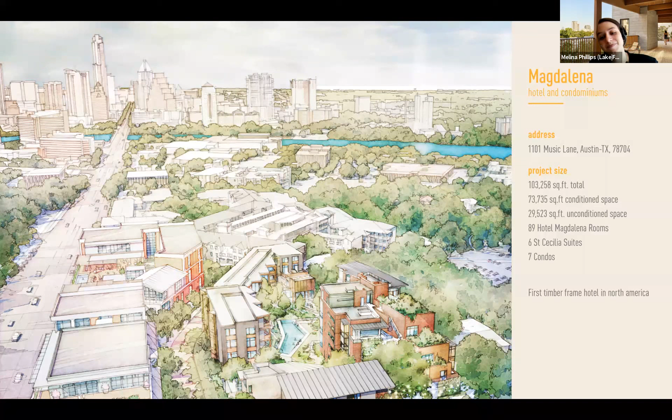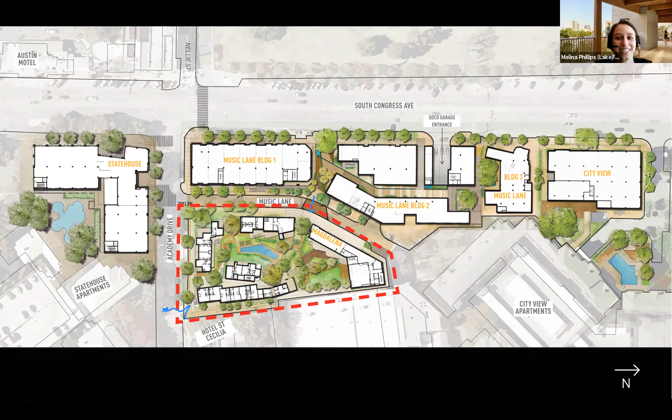So I'll give you a brief history of the site where the Hotel Magdalena now sits. In the 1930s, all the way up until the 1970s, South Congress was the highway that connected San Antonio to Austin. As you drove into the city, there were many ultra-modern motor courts that were dappled along the street, leading up to the state capitol, which is larger than the nation's capital, and it was this big, beautiful moment.

In the 1950s, Terrace Motor Hotel opened its doors with 366 rooms, 2 restaurants, the Char Grill Chop House and Summer House, which is actually the name of our restaurant currently, Summer House on Music Lane. It was the first convention hotel in Austin, and people came from all over the state to bring their families there to vacation, maybe to meet the singing barber that was greeting them down in the basement.

In the 1970s, when I-35 came to be, a lot of the traffic in the area got rerouted. This led to the disrepair and sort of seediness that became South Congress. 1974-ish, Willie Nelson came in and bought up 14 acres east of Congress, including the Terrace Motor Hotel. At the time, it was apartments. He had his friends and roadies and bands come and stay and hang out there.

He actually had a falling out with a guy who owned one of the music venues downtown Austin. And he thought, you know what? I have this convention center. Why don't I turn it into a music venue? And so he did just that. It became the Austin Opry House. It was legendary for 30 plus years. And the likes of Ike and Tina Turner and Dolly Parton came and played there.

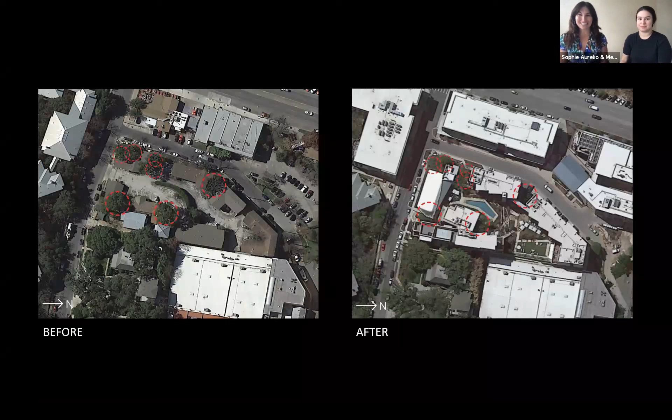On to Christine. So I'm going to talk a little bit about the site now. These before and after photos show the similarity of building massings between the terrace apartments on the left side and the new hotel development on the right. Much of that decision on the design team was in order to protect the 7 heritage oaks shown in the red dashed circles. The existing conditions were very constrained, with small planting areas retained by walls and surrounded by tons of asphalt. We significantly improved the rooting conditions of those trees.

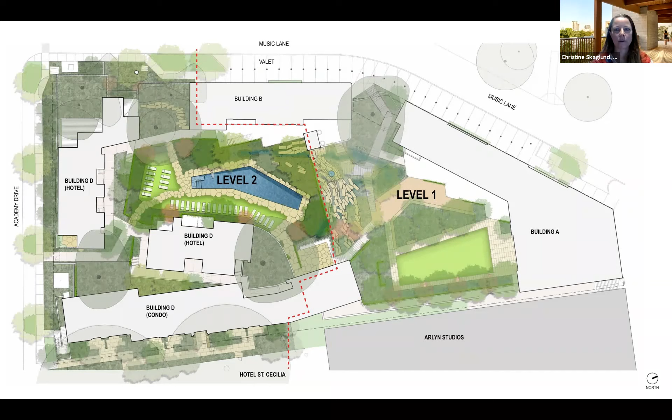This plan shows the new design with the buildings oriented around the perimeter and courtyard green spaces central to the project. The exterior streetscape is highly urbanized, 1 block off South Congress, while the interior is a secret and peaceful oasis that is not revealed until entering the project. The overarching design inspiration was that of a 70s lake house within the context of dramatic hill country geography. Local materials were utilized and a thread of water conveys across the site.

And this diagram better depicts the elevation changes across the site, which measures about 1 acre with 29 feet of grade change left to right.

Sorry about the trash pickup outside.

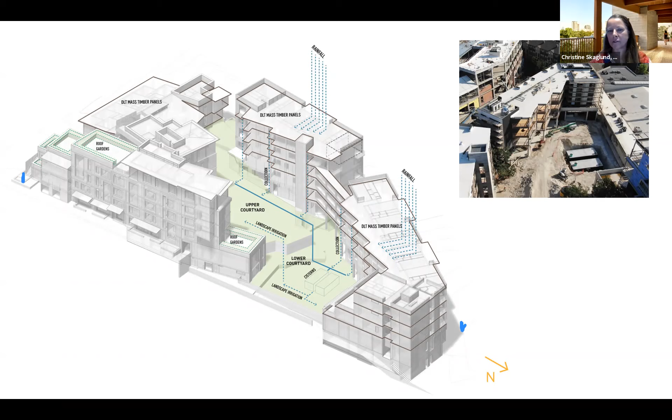The 4 buildings have multiple finished floor elevations, making ADA access challenging. Also, all stormwater is held on site, making drainage especially challenging. Surface flowing rainwater across the steep quarry block wall then conveys under pedestrian bridges to designed rain gardens at the lower level. Building downspouts hard pipe to underground cisterns under the event lawn. The inset photo shows the cisterns being installed in solid limestone. The water in the cisterns is reused for landscape irrigation.

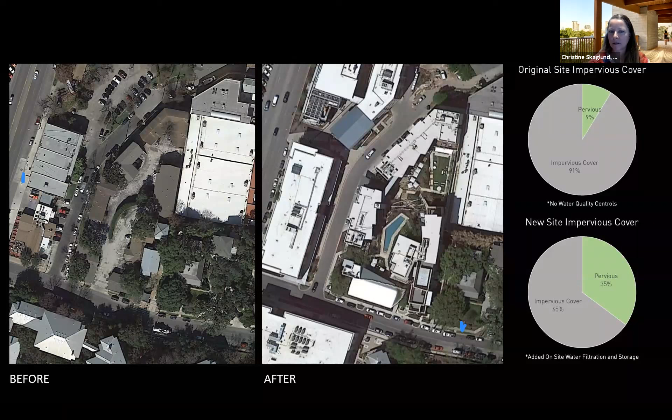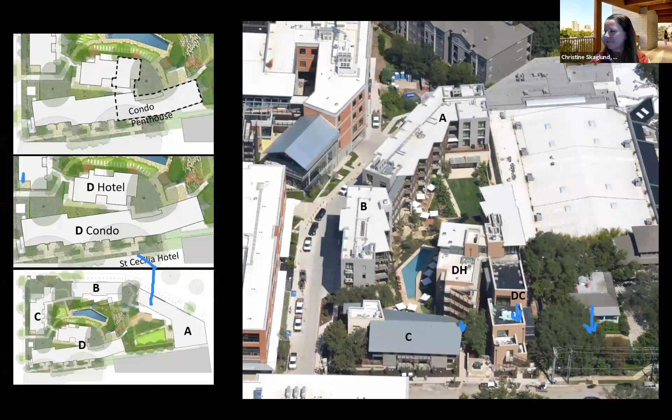Yes, I'll just give a brief overview of the architecture. So here's an overview of the different buildings on the site to help orient you. Buildings A, B, and C are mass timber type 5A construction over 1A podium for buildings A and B, as C is slab on grade. Building D is type 2A, mostly concrete structure with steel for the framing of the penthouse only. Building D is split between hotel and condo residences with the penthouse spanning both wings at the top.

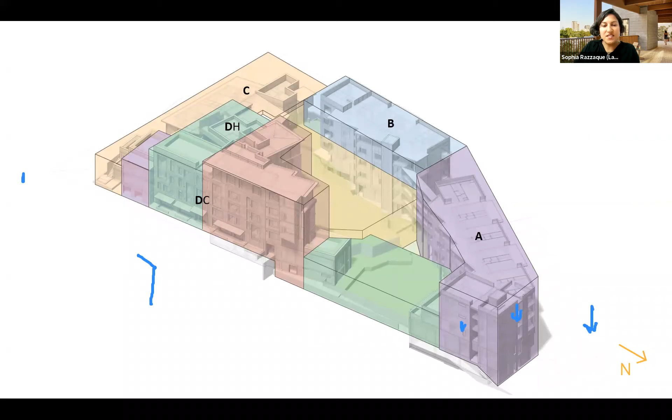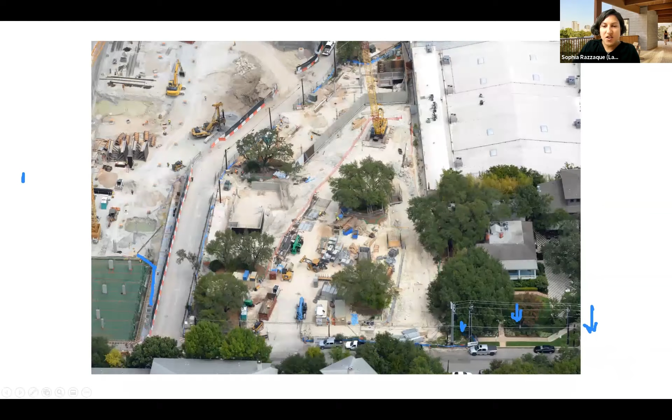And here is a time lapse we put together from the aerial photos that the contractor sent us over the course of the project to kind of help show the sequencing of the project. The concrete started first, then the mass timber, with buildings A, B, and D happening first, and then C came in last, basically once the landscape was complete.

And now I'll hand it to Melina. All right. I don't know if we can clear the annotations there, but yes.

Yeah, so our finish palette had a variety of materials. The hotel portion of the project mostly consisted of stucco volumes over stone, with sunken groove wood siding in the recessed porches and some other areas like at the restaurant down below. The exterior wood structure, both framing and the decking, were all Doug fir as well, but they were finished in a weathered gray stain that we coordinated with StructureCraft on.

And then the residential portion of the project, which is on the right, was wrapped all in two Norman 5 brick blends. And after mock-ups and dry stacks and all that, we also had to work with Acme on rerunning a couple of the color blends. Well, one of the colors actually had to be run twice, but we were able to figure it out despite the really busy manufacturing queue that they had at the time.

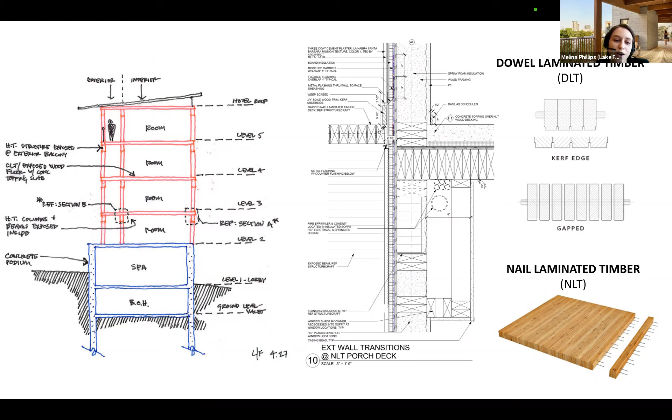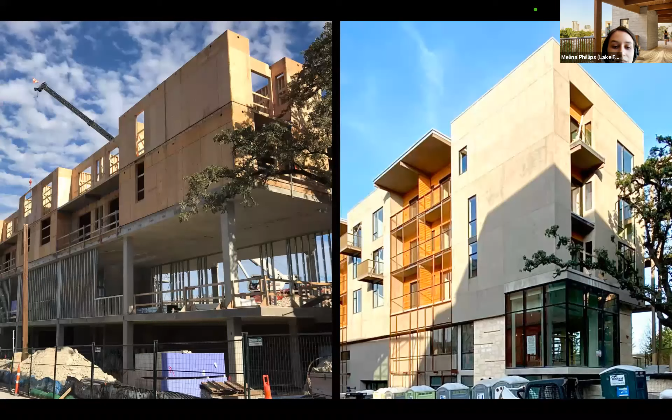Our office also did an LCA analysis after the project, and we found out that by using mass timber for the 3 hotel buildings instead of concrete and steel, we were able to reduce the global warming potential by 10 to 38%, depending on if biogenic carbon is included in a calculation or not.

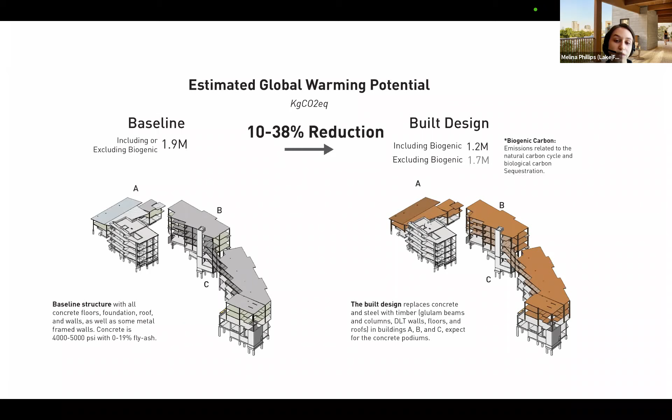And the use of mass timber also helped us further reduce the carbon footprint. One, because the single loaded corridors that are typically enclosed and conditioned were pushed to the exterior and being completely outdoors. And then 2, by exposing the mass timber on the interior, there were a lot of finished materials that were also not necessary. And I'll hand off to Ruthie.

Thanks, Melina. So as the structural engineer, our work usually gets covered up. So it's very fun to be on a project like this where we can showcase the structure. There were actually 2 structural engineers on this project, like people have been mentioning. My firm, AEC, did the base building up to the PT podium slab for the hotel buildings A and B, as well as all of the structure for the DC and DH buildings. And then StructureCraft did the mass timber levels that sit on top of our podium at the hotel buildings.

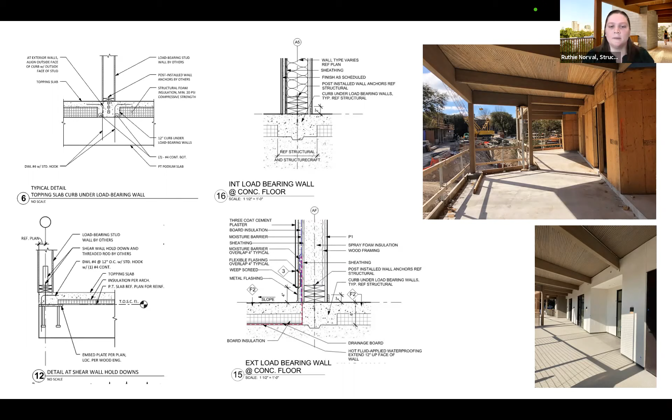This required that we use a different aggregate. A small diameter washed river rock was used for the topping slabs to give them the desired finish, rather than a typical larger sized limestone aggregate that we use in the structural slabs. Finally, separating the topping slab from the structural slab below allowed us to add an insulation layer. This rigid insulation allowed for the built-in slope at the balconies, separation between unconditioned space above and conditioned space below, and protection of the waterproofing layer.

So I mentioned that the topping slabs were ground down to expose the aggregate. While we ended up with a gorgeous final product, there were a few bumps along the way. These 3-inch topping slabs were poured during the summer, which meant that the slab was already very prone to shrinkage cracks, of which we had a lot. The control joints weren't installed in the right time frame, and so the cracking of the slab had already begun when it was realized that they hadn't been placed.

One final interesting structural coordination item was the column bases. Originally, the columns would have sat on top of the topping slab and insulation floor sandwich. However, because of StructureCraft's very tight installation timeline and lack of availability of higher compressive strength insulation, the concrete column base plinths had to be poured first. This allowed for the topping slab and the breezeway to be poured later while mass timber installation continued.

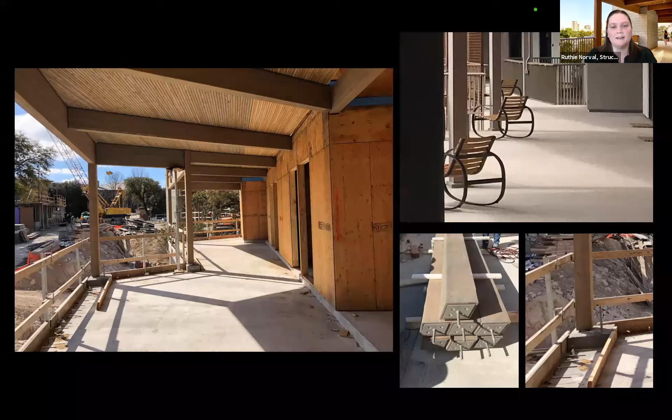So now I'm going to pass back to Sophia, who will talk about the public spaces in the hotel. Thanks, Ruthie.

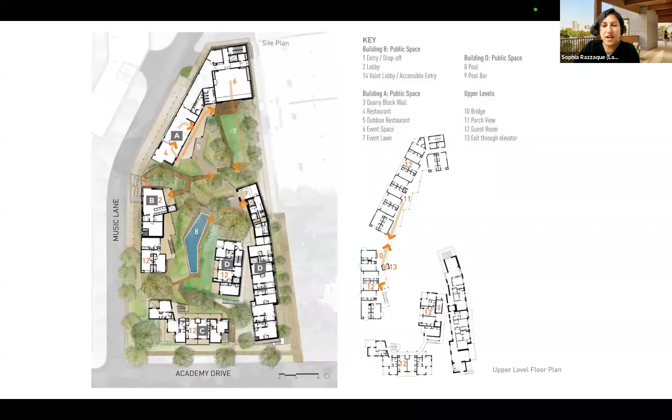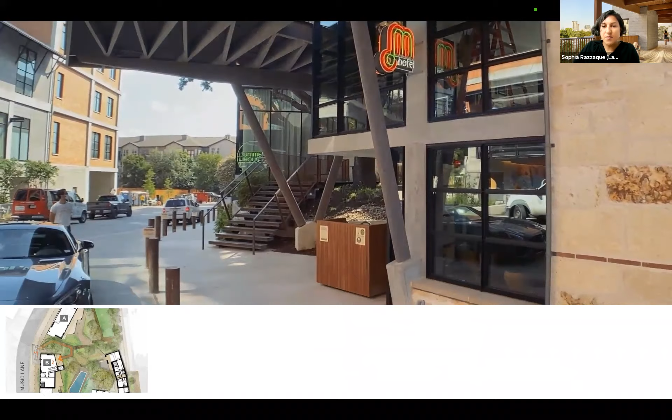Here's an overview of the entire tour route, starting at the entry, moving through the public spaces, then visiting the upper level walkways and a typical room, and finally ending via the main elevator back down to the valet lobby. Guests arrive at the street under the custom designed heavy timber framed porte-cochere. It has those V column references Melina talked about. And you're invited to take the stairs up and around the heritage live oak tree that Christine mentioned earlier, leading to the lobby above.

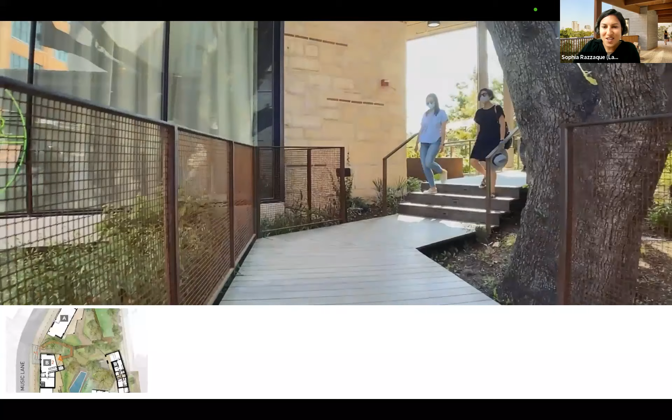Along the way, you get that sense of compression under the bridge and then release out into the oasis that is the courtyard. You hang a right and see the lobby with its large pocketing door open, pulling you into the space where you're greeted by one of the many super friendly hotel staff to welcome you in.

Lake Flato worked collaboratively with Bunkhouse on the design of the interior spaces. They designed the desk and we worked with them to make sure their functional needs were met and power and data was provided as needed. Bunkhouse early on had an inspiration photo of the terrazzo floor they were envisioning, and we worked with them on the pattern and documentation so that the contractor knew what the expectations were. The big architectural design moves were to tuck the seating area into a bay window that hangs you above the street below, while the large pocketing sliding door allows the lobby to spill into the courtyard.

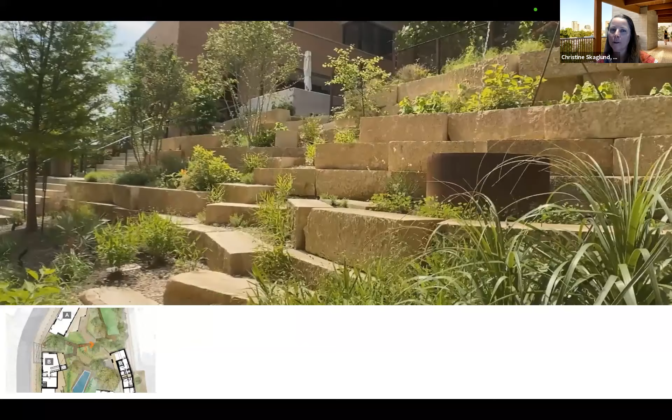Christine? Now I'll talk a little about the construction of the stacked Luders quarry block wall that retains about 15 feet between the upper pool courtyard and lower event lawn and restaurant terrace. The fountain springs from the limestone, inspired by a natural hill country seep. The plantings are all native or adapted.

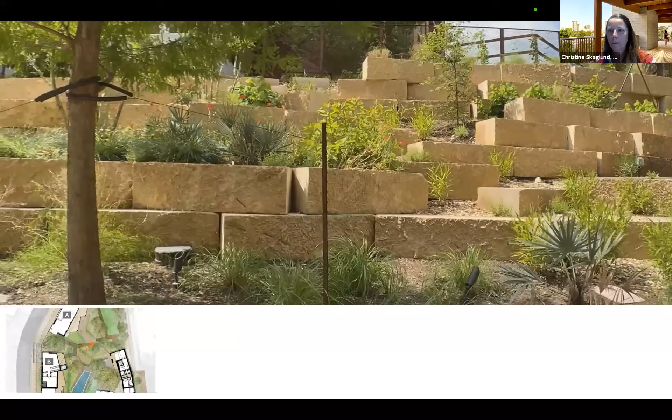This series of imagery shows the engineered construction detail for the quarry block retaining wall with planting terraces and a plan view of that same detail at the top right, and a SketchUp 3D export of the actual designed conditions, color-coded for clarity on grading, below that. This diagram was actually heavily used in the field by the landscape contractors for construction.

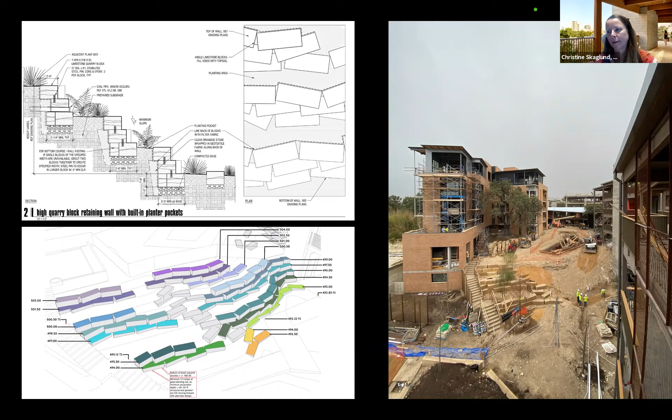And on the right, you see half that quarry block wall constructed, including tree installation, leaving the right-hand side open for access to the lower level. Once that's closed off, the lower terrace will be closed to heavy machinery. Everything will have to be hand installed.

They used a forklift with straps to place each block following base preparation, which included compacted aggregate. The last blocks had to be placed from above with a skid steer to reach out over the top of the wall. And at that point, everything's closed off, as you can see in the right-hand side. And I think Sophie is going to talk about the restaurant now.

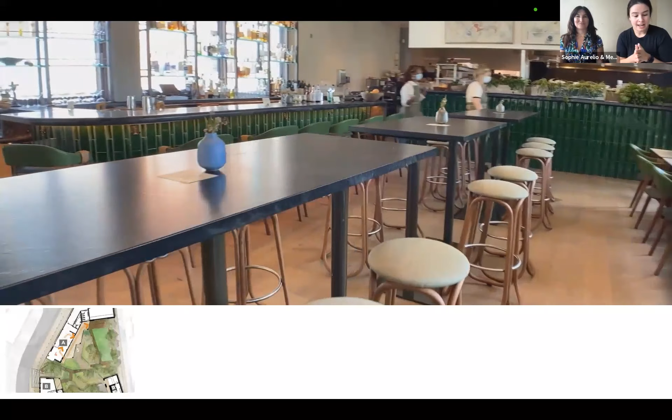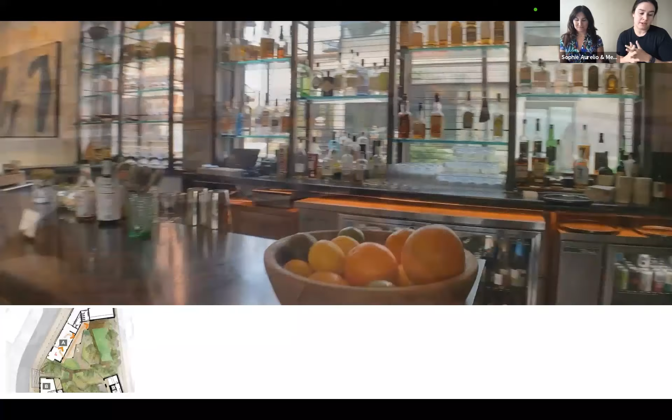Yes, so if you turn to the left instead of going to the right to the lobby, you'll hit our 3-meal restaurant, Summer House. It was extremely important to us that we captured the natural, casual, earthy, rebellious nature of Austin in this restaurant, and it really embraced that unique experience and focused on that exterior portion of the site. The design and feel is a nod to Austin in the 70s lake culture. We wanted it to feel unpretentious with an air of sophistication.

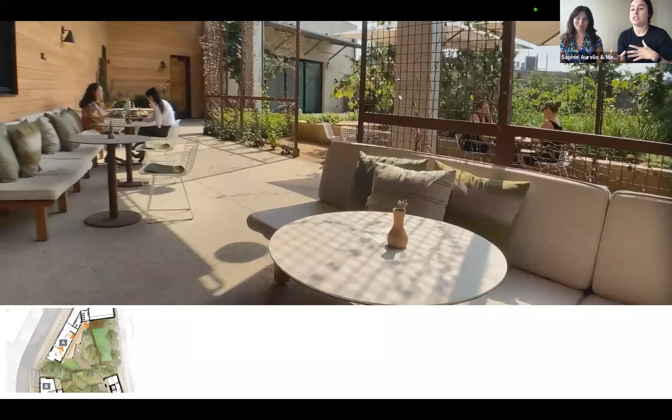The heart of the restaurant is the open kitchen with a wood-fired grill. Bringing the look and feel of a lake house weekend with friends into the heart of the city was the main design push in this restaurant area. There are 100 seats, 40 interior and 60 exterior, again focusing on that exterior courtyard element and that permeability to nature. The appeal was to get the neighbors involved as much as possible, as well as the South Congress tourists and hotel guests, so it truly felt like a neighborhood spot.

It was important to us that the interior of the restaurant and the exterior felt one and the same. Lake Flato gave us such a beautiful palette along with the landscape architect to create these lush gardens, and we wanted the inside to reflect that. So we went with natural materials, things that you would find in a lake house environment, as well as keeping the main color scheme green so that your focus was always back out into that exterior courtyard.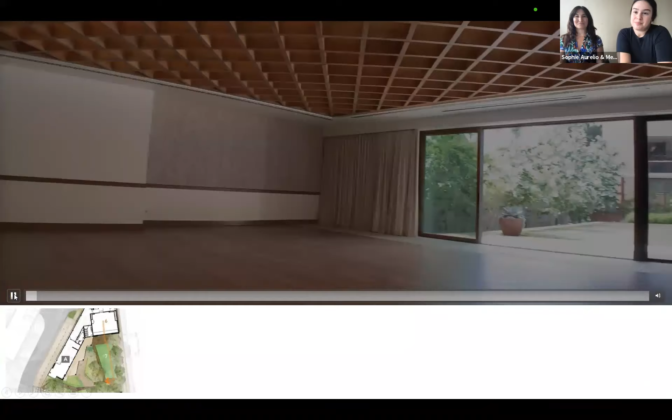Moving through after you hit the restaurant and you continue onto that lobby level, you'll hit our event space. We have 1,500 square feet interior space, as well as 1,500 square feet on the lawn. The large design move was to open the interior to the exterior for a truly seamless experience for a maximum of 200 guests. It's been extremely well received. And Meghan is going to talk a little bit about some of the programming that we have.

So Bunkhouse is legendary, I would say, for some of our cultural programming. We have been able to include many local musicians that we partner with over the years. We actually have just installed down in our Valet Lobby a song confessional box that is a true confessional. And you go in there, you record a story about your life, sinners and saints alike. And we have a musician partner with us, and they'll do a residency every quarter. So they'll stay for 5 days.

At the end of their 5 days, they'll do a DJ set at the pool or do an acoustic set out on the lawn. And they will also pick at random somebody's story from the confession box and turn it into an original song and press it on a 7-inch vinyl. We've done lots of concert series, movie screenings, yoga on the lawn. We've partnered with Free People to do some really fun jogs around Town Lake, and then you come back and have a cocktail from our food and beverage team. We've also had lots of great weddings and corporate events alike.

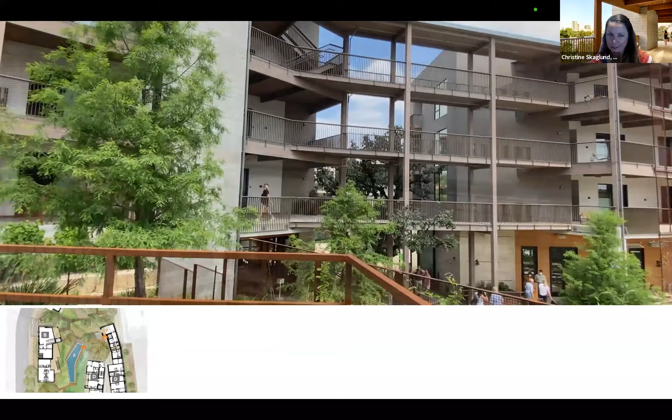The pool with its sloping lawn was inspired by Barton Springs. Early design conceived of real turf, but it was quickly determined to be unsustainable for maintenance given the amount of pool water, foot traffic, and loungers in this location. Irregular Lueders paving comprises the deck and coping. Note that there is no joint separating the two. The railing was also added as a temporary measure to keep people from falling into the rain garden swale. So there was more than a few lessons learned on this project.

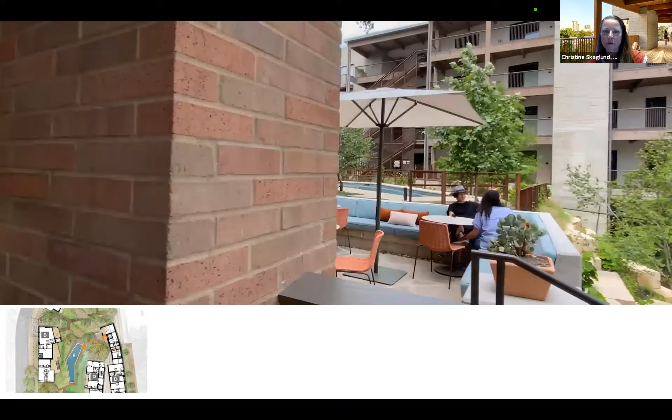The pool courtyard and outdoor pool bar offer views of the lower terrace and downtown Austin beyond. The roof of Arlyn Studios, just to the right of this view, is screened from view with fast-growing sycamore trees. There's the pool bar that Bunkhouse was speaking of, and the semicircular concrete wall on the left is the last remaining vestige of the terrace apartments, having been protected during construction and sandblasted to match new adjoining walls.

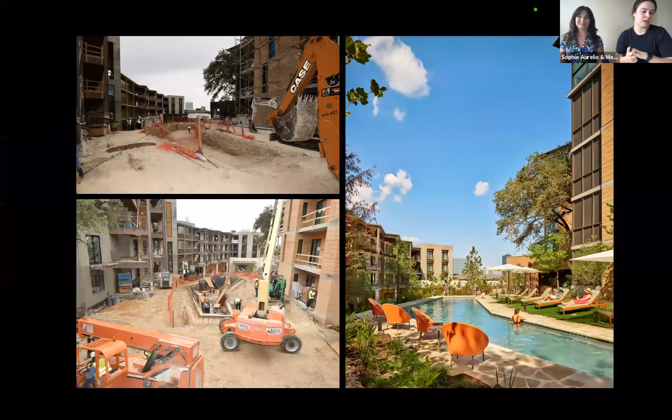The design of the pool bar was located in the heart of the project. The pool bar emphasizes the spirit of Magdalena, and the rest of the project takes a nod from local materials. We wanted this space to feel a little bit more playful, as the nature of pools and the bathing culture of the 1970s in Austin.

So while greens and natural beiges and browns are the focus in that kind of lobby and restaurant space, here we punched it up with a little bit more fun with the pops of that terracotta, electric orange, and then the deep blue for the pool.

Moving up to the top level, you can see the amazing 360-degree views of the courtyard and pool below, really recalling that hill country lake house vibe. Heading towards the bridge, here in a second.

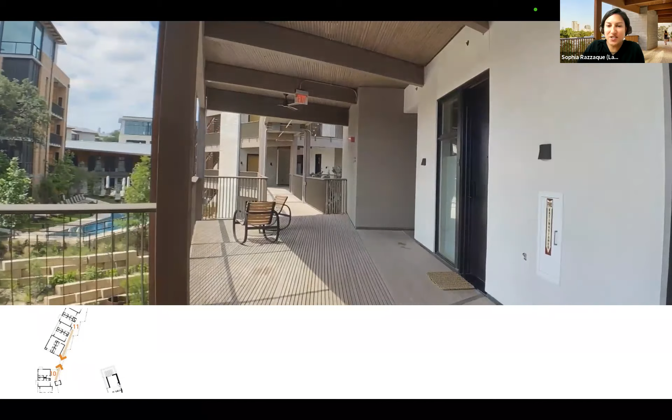Heading towards the bridge, you can see the gapped versus solid DLT panels that make up the exterior walkways and porches. The solid panels help mitigate the noise of roller bags and hotel carts closer to the hotel room doors. The gap portion allows light and air through to the levels below, creating a warm and inviting feel.

The bridge that we just walked over is part of our exiting strategy between the building A and building B hotel rooms. We wanted to tell a quick story about how during construction we had to have part of the bridge refabricated due to the conflict on site of the footing location, which would support the vertical columns above, and the tree limb we intended to save.

We had a pretty significant change order to help make this happen, since it took some added engineering and refabrication of the 3 middle walkway panels and shortening of the adjacent panels to the left.

Then at the end of the project, the fire marshal almost made us cut it anyway, but the property wrote a letter confirming that the branch will be maintained to not conflict with the sprinkler pipe. So basically, we had to cut the branch above, but we were able to keep the one below, which was a win.

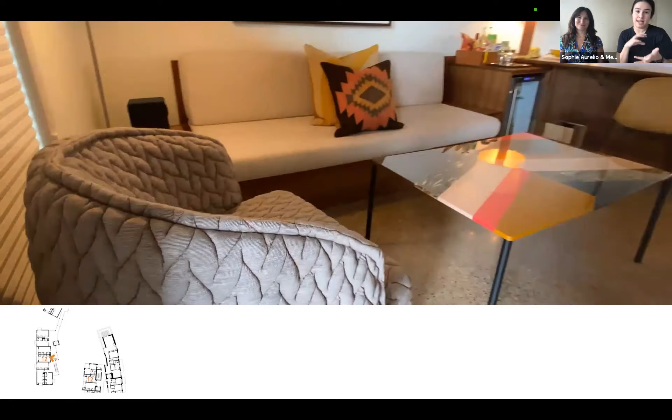Moving into the guest rooms, each guest room is laid out to showcase the connection to the exterior and interior spaces that we brought into the public areas. We let the structural elements be the star here, with that exposed river rock aggregate, as well as the dowel laminated timber ceilings. The tile walls in the vanity and the bathroom are the feature and pop nicely against those neutral elements.

We have 4 different color schemes: red, yellow, green, and blue, so that each time you come and stay, you have a little bit of a different feel. The FF&E, the furniture, was coordinated with those tile colors, and the tile was custom made for us in Spain to color match some of our RALs.

So it was kind of a true labor of love for the rest of Magdalena, that there was no detail spared. And the tile pattern became kind of a key feature in that construction. The contractor was not super happy with us.

The layout of the rooms is set up so that when you walk into the room, you'll hit a lounge first, then going into more of your workspace type environment at the desk, which functions as our mini bar. And then the desk flows down into the headboard and focuses again on that exterior. Almost all of the guest rooms have a private patio. The ones that don't do have large 6x6 windows to showcase that exterior nature.

And in order to prioritize that sense of reflection, we've hidden the TVs behind the drapes. So that was a large scale coordination item that we found out in the model room that we really wanted to hit. And so because of that, we really had to get our TV, our bracket, and the wall dimensions really dialed in so that we could coordinate our ceiling tracks with the dowel laminated timber. So it was all thought through very early on and then executed in the field very well.